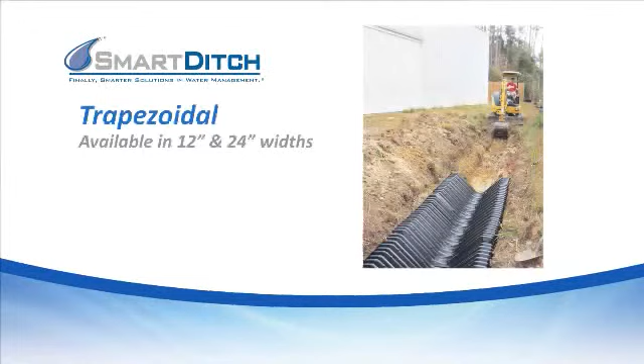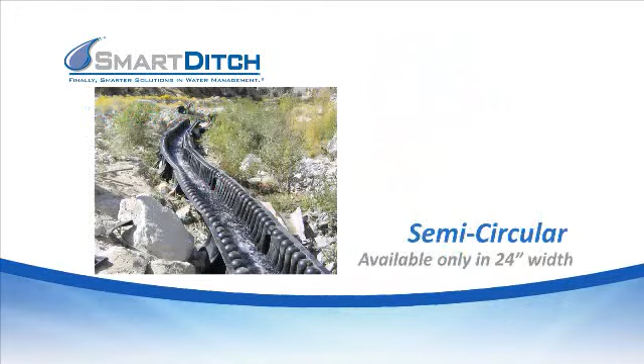SmartDitch comes in 2 shapes and 3 sizes. Trapezoidal, which is our most popular design, in 12-inch and 24-inch widths, and a 24-inch semicircular shape, commonly used for above-ground installations, and as a temporary water diversion device. For very large channel lining applications, the MegaDitch system was developed as an expandable ditch liner and can be constructed to virtually any size and depth channel.

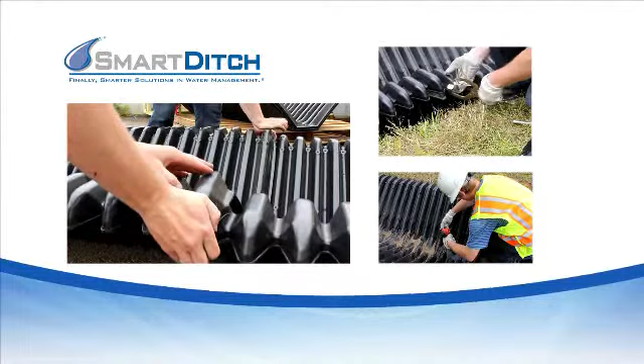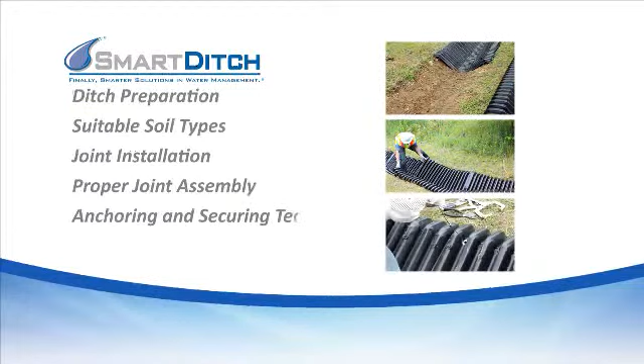What separates the SmartDitch line of products from other ditch lining methods is its speed and ease of installation. This video will focus on the SmartDitch installation procedures. It covers ditch preparation, suitable soil types, joint installation, proper joint assembly, anchoring and securing techniques, and finally, backfilling and tamping. If you follow these simple steps, we are confident your SmartDitch lining system will install quickly and perform properly.

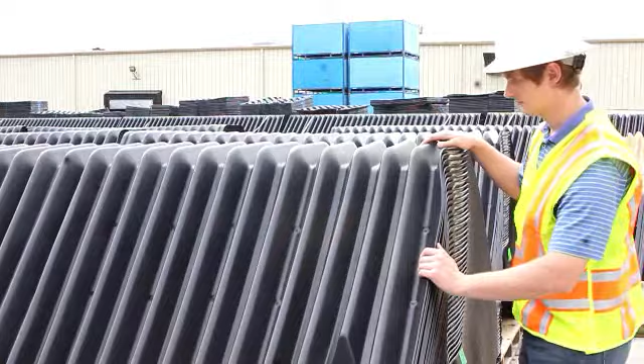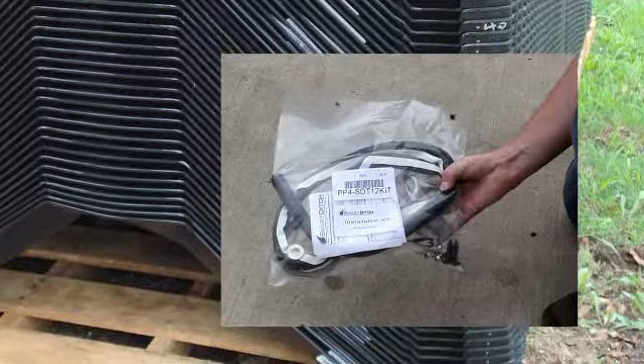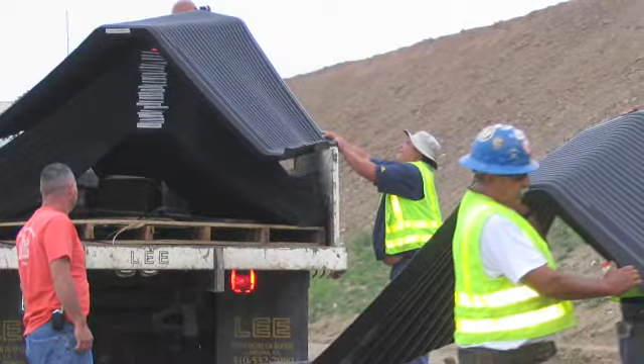SmartDitch will be delivered to your location on pallets. Visually inspect the liners for any damage that may have occurred during shipment. Ensure that all hardware components are also present prior to accepting a load. These items will typically be packaged in boxes underneath the ditch parts or on a separate pallet. If the hardware components are missing, the load should be rejected. Please be sure to specify a flatbed truck or enclosed trailer as delivery choice for the location capabilities for unloading.

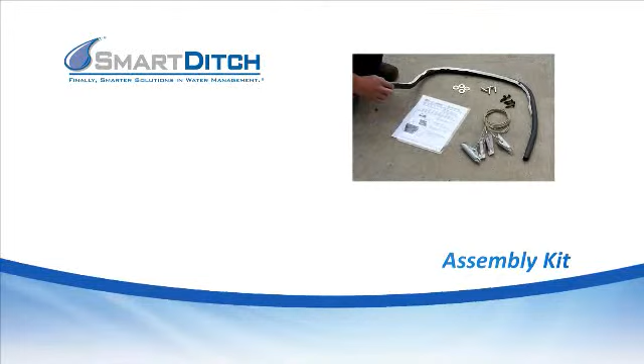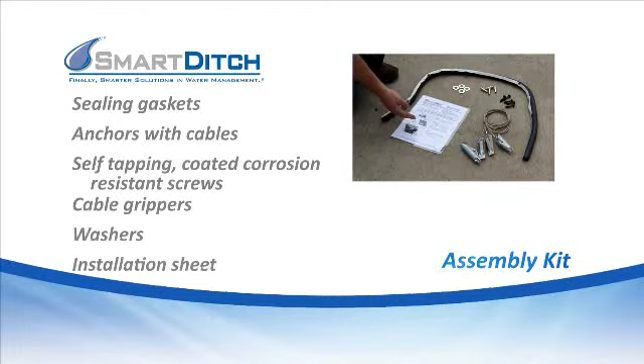Become familiar with the contents of the assembly kit, which includes sealing gaskets, anchors with cables, self-tapping coated corrosion-resistant screws, cable grippers, washers, and an installation sheet that must be read thoroughly before you begin the installation. Make sure you have the following tools after excavation: a battery-operated handheld drill, 1/2-inch drill bit, heavy-duty pliers, 2 vice gripping tools, a number 3 square or Phillips head screwdriver, a 3/4-inch electric-powered hammer drill, and a 1/2-inch diameter by 32-inch long driving rod for anchor installation.

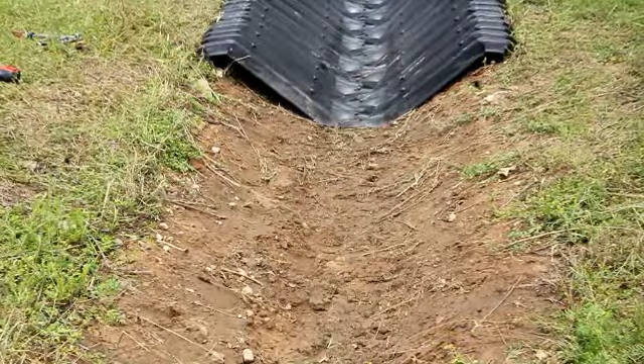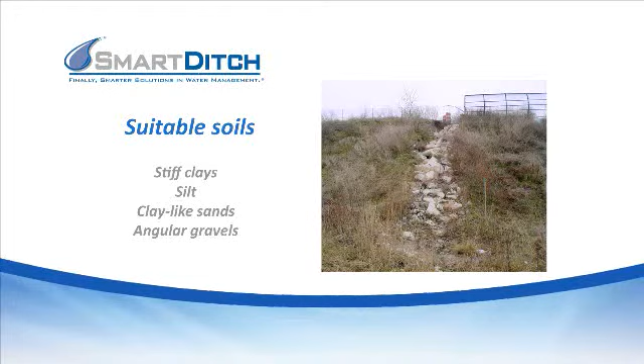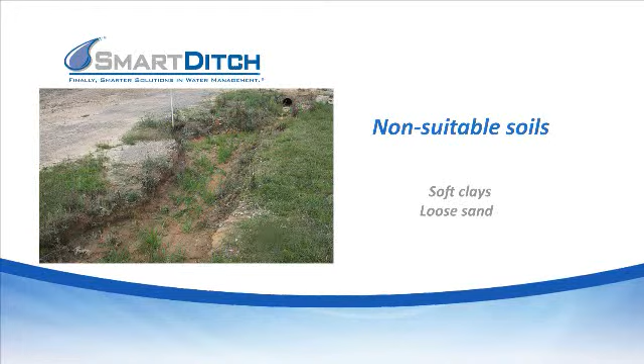Soils need to be able to be excavated and remain unsupported with a cross-section that mirrors the cross-section of the SmartDitch, which is designed to a 1-to-1 side slope. Suitable soils include stiff clays, silt, dense silty or clay-like sands, and angular gravels. Non-suitable soils include soft clays and loose sand. If these are your conditions, they need to be removed and replaced with a suitable soil fill. You can stabilize non-suitable soil with quicklime or fly ash. If the ditch bottom is soft, it can be stabilized with sandy gravel or crushed stone compacted to 90% density. Please call SmartDitch Engineering if you have any further questions.

To ensure the safest work environment, always wear steel-toed boots, a hard hat, work gloves, and safety glasses. If you are on or near a high-traffic area, safety vests are also encouraged.

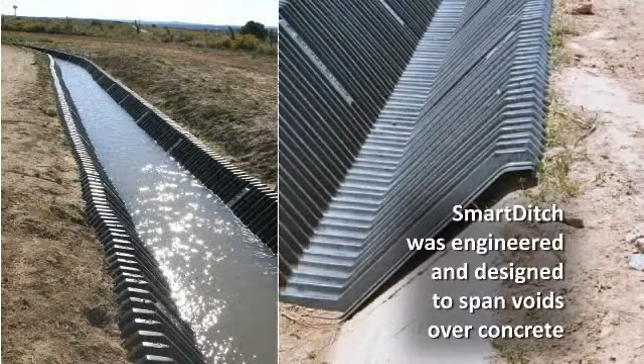If you are relining an existing concrete lined channel, it is important that all debris and loose, broken concrete be removed. However, it is not necessary for you to fill the voids created from the removed concrete. SmartDitch's patented rib design provides the strength and rigidity that helps maintain its shape when covering voids.

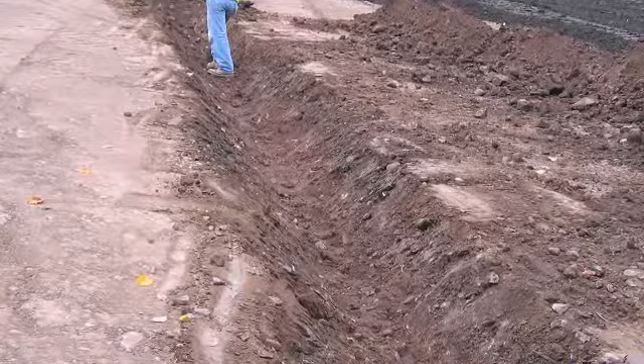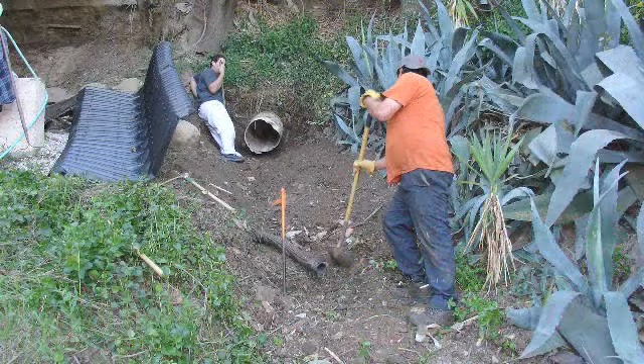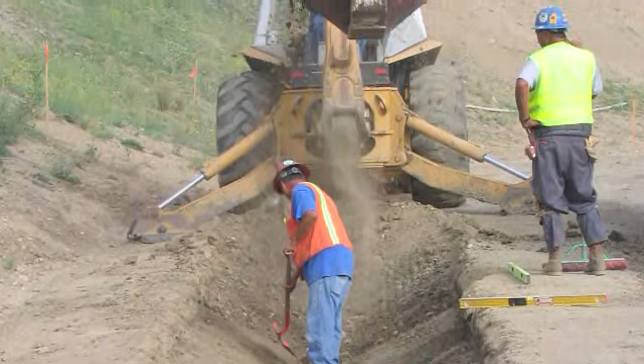Whenever possible, the soil should be excavated as close to the profile or shape of the SmartDitch liner. We realize that this cannot always be achieved, especially in rocky terrain. Unstable soil should be removed and replaced with compacted soil fill. It is the responsibility of the local design firm to determine the soil type. Excavation can be accomplished with either a small backhoe or one with a modified bucket to simulate the shape of the SmartDitch, like this one shown for large-scale SmartDitch installations, or with picks and shovels for short sectional ditch repairs.

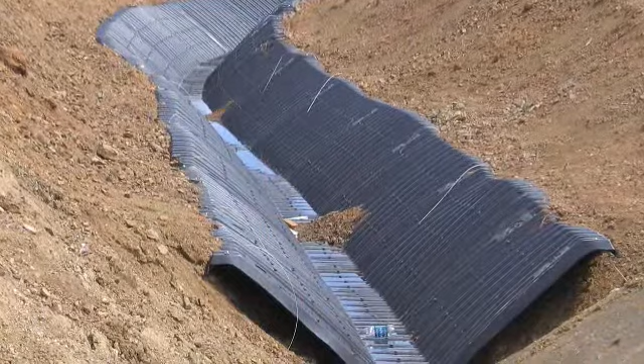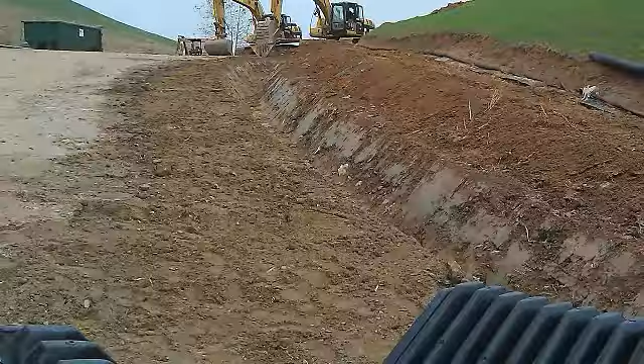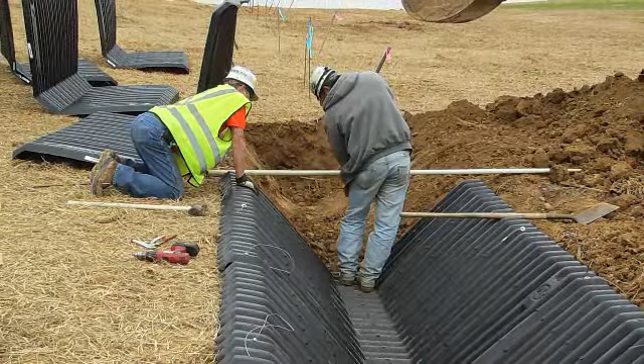It is important to note that over-excavating will require more backfilling once the installation is complete. Ideally, you should limit backfill to 4 to 6 inches along the sides of the SmartDitch. The excavated ditch should be as firm and smooth as possible, with no sags or clumps of dirt to complicate installation. The subgrade should be free of debris, rocks, and sharp objects. Tree roots should be either trimmed or removed. The ditch's slope should be at least 0.5%, which is the minimal grade to ensure proper drainage and self-cleaning velocity.

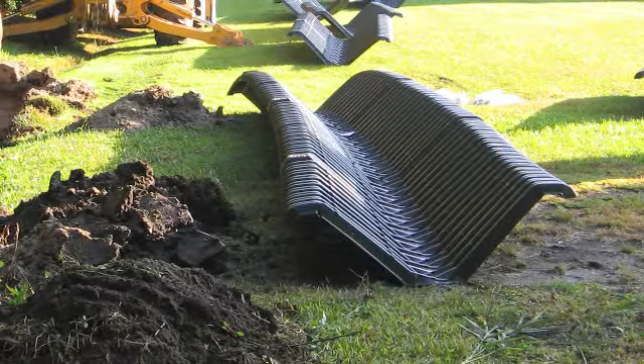Place SmartDitch sections end-to-end along the ditch bank. We recommend connecting no more than 3 sections at a time prior to inserting them into the prepared trench. Place the supplied sealing gasket on the inside of the last upstream channel groove. Once the gasket is secure, nest the upstream section over the downstream section. This practice is just like shingling a roof.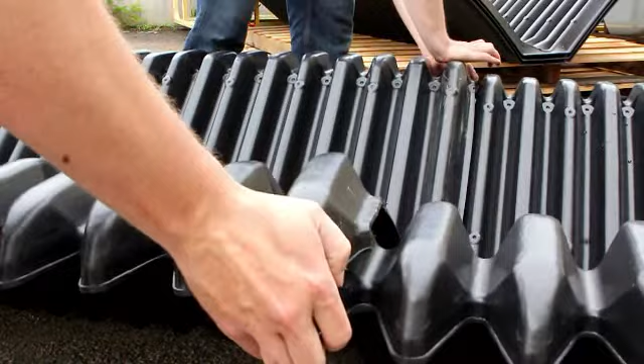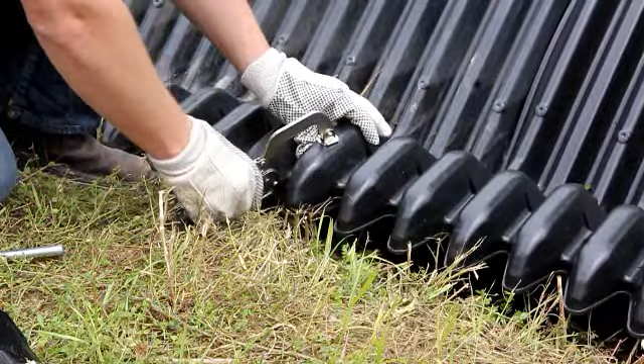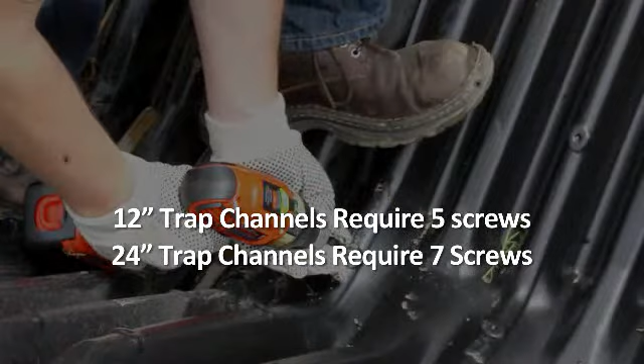Place a vice gripping tool on each side of the joined sections to firmly hold them in place. Using your drill, firmly secure the coated self-tapping screws through both nested liners at the dimples visible on the sides of the overlapped ribs. Each overlapping 12-inch channel section requires 5 screws for proper assembly. The 24-inch channel requires 7, and 24-inch semicircular uses 5.

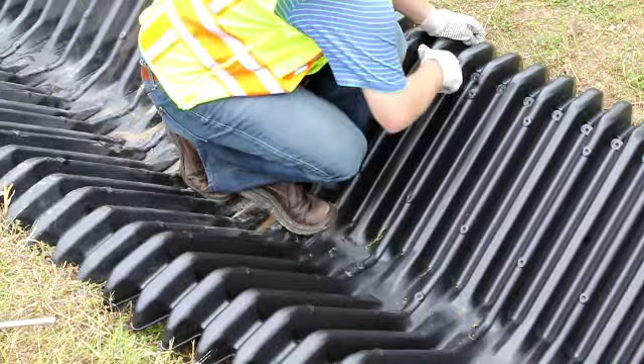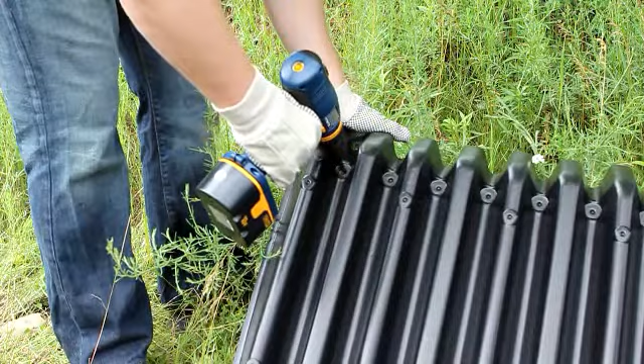Visually inspect the sections to ensure the fastener screws have securely joined the sections. Place SmartDitch sections in the ditch and ensure the sections fit as snugly as possible. Prior to installing the supplied cable anchors, you will need to pre-drill half-inch holes through the top of the overlap joints at both ends, and also drill at a mid-length point between each section. These holes are where you will thread each anchoring cable.

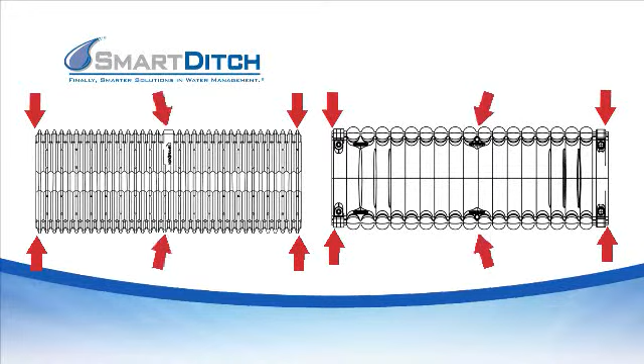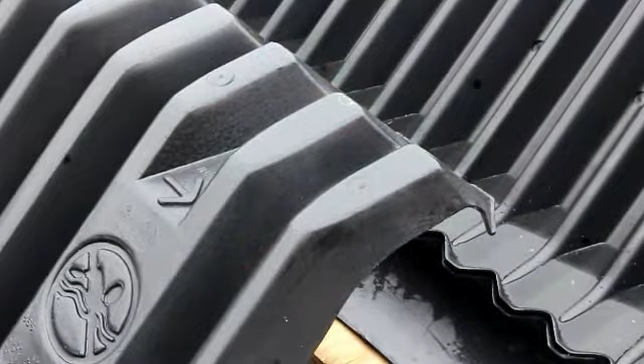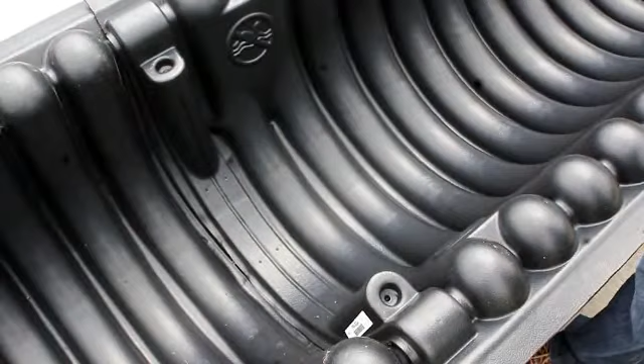If assembling a 12-inch trapezoidal channel, you will drill out the preformed dimples between the ribs. For the 24-inch trapezoidal channel, drill out the preformed dimples on top of the ribs. For the 24-inch semicircular channel, the pilot holes are drilled at the top of the channel.

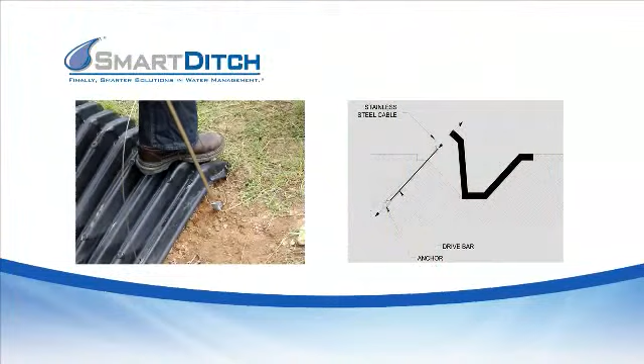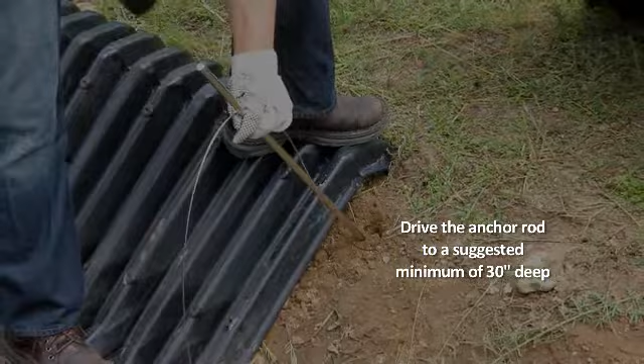Place your driving rod into the anchor and place the anchor on the ground. Angle the point of the anchor perpendicular to the sidewall of the SmartDitch channel. Once in position, using either a sledgehammer or a hammer drill, drive the rod to the required depth. When the anchor is driven to the required length, a minimum of 30 inches is suggested, thread the cable through the drilled holes.

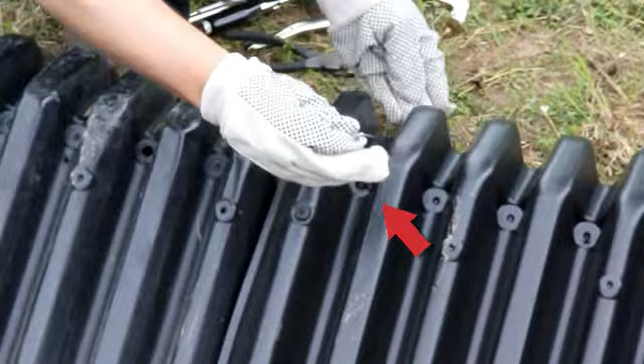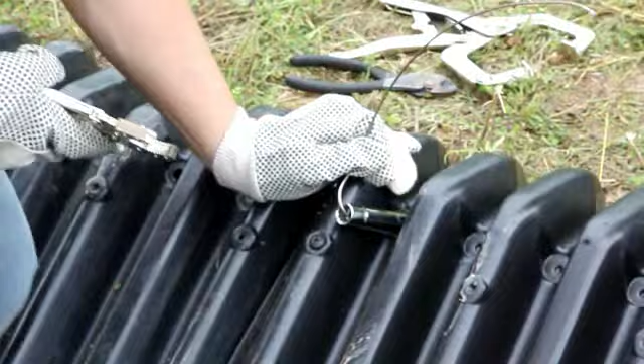Slide the washer over the cable, and then the anchor cable lock. Note that the narrow end slides on first. The cable lock should seat itself against the washer. Using your pliers, grip the cable and press the cable lock down into the base of the pre-drilled hole until the anchor is taut. Trim excess cable, but leave 6 inches to allow for adjustments to be made at a later date. Repeat the process for all sections.

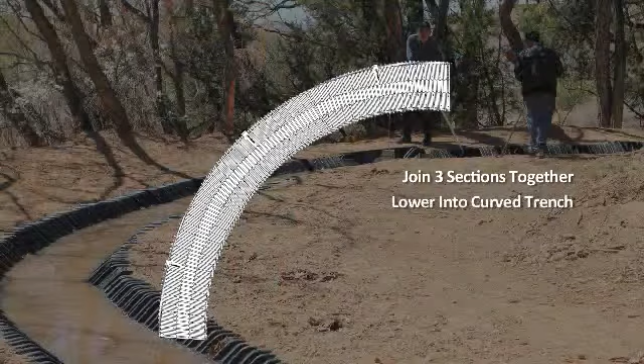SmartDitch can be installed on a curve by assembling 3 sections on the ground, lowering the beginning of the 3 sections into the trench, connecting and anchoring to the last installed section. The 3 sections should be lowered into the curved trench with the remaining anchors installed. It may be necessary to cut out the upper knuckle at the midpoint of each section to provide more curve flexibility, as directed by Penta Engineering.

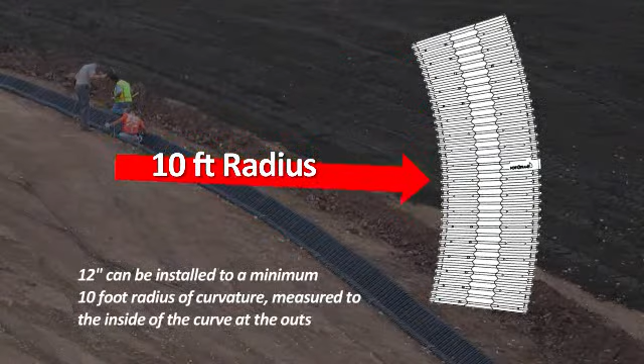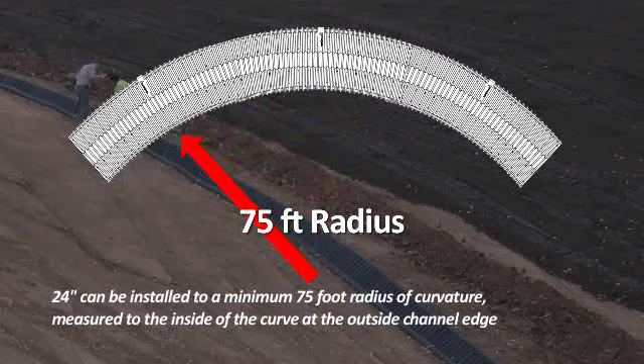The 12-inch channel can be installed to a minimum 10-foot radius of curvature, measured to the inside of the curve at the outside channel edge. The 24-inch channel can be installed to a minimum 75-foot radius of curvature, measured to the inside of the curve at the outside channel edge.

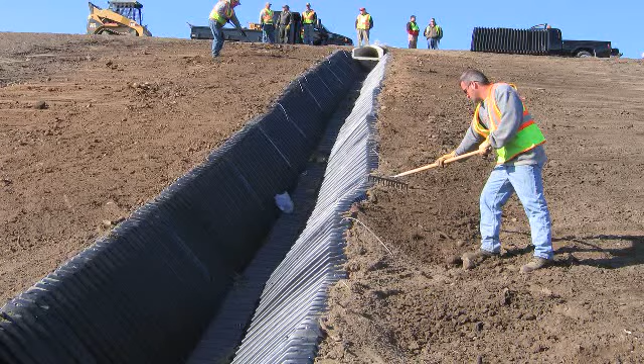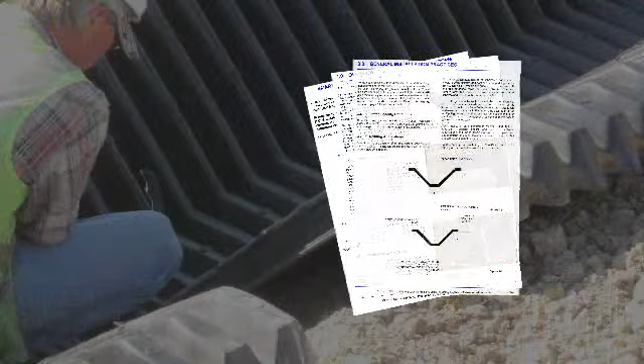Backfilling is the most important part of a SmartDitch installation. Lateral flow or runoff should never undermine the ditch. Therefore, it is important to use the appropriate backfill material. Refer to the SmartDitch technical manual for examples. In some cases, a 3-foot heavy gauge flat sheet may be suggested to prevent undermining. Contact SmartDitch Engineering for help to determine the best materials and methods for your project.